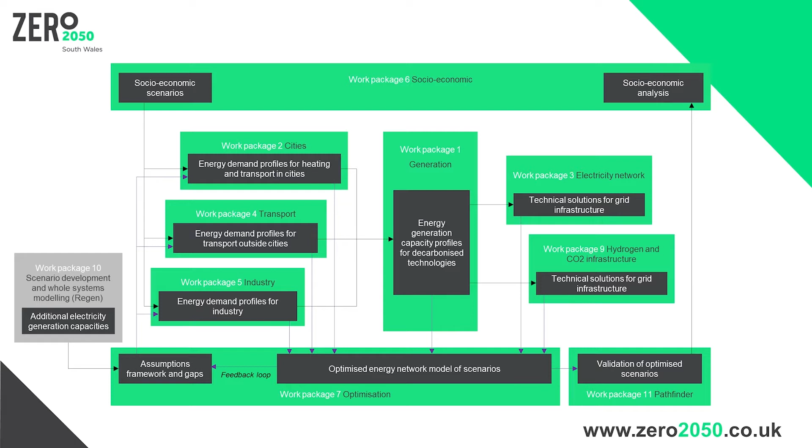This slightly complicated looking slide gives you an insight into some of the challenges that we've faced with this project, with lots of different input from different technical specialists. Making the connections, interdependencies and data flows clear between the teams has been one of our key challenges. And we're now at the point of beginning to have a confirmed set of inputs to our modelling, with initial results to follow in the weeks and months ahead.

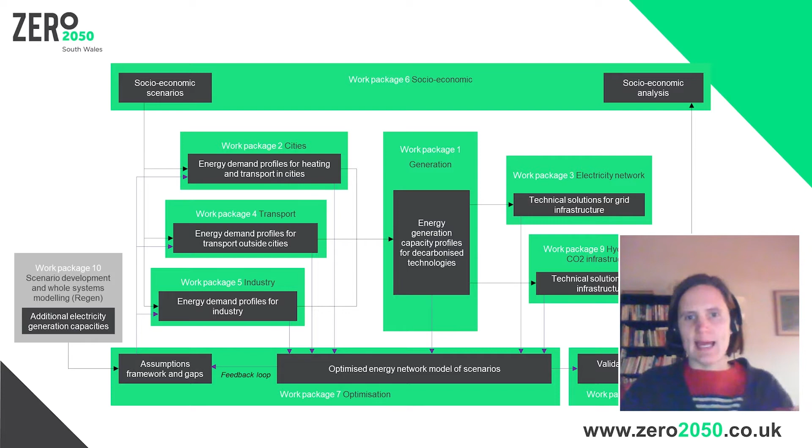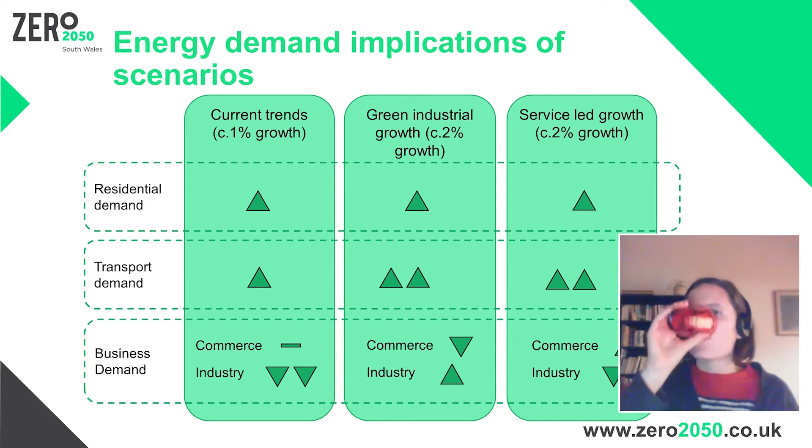So a little bit earlier, I mentioned scenarios. These are the 3 socioeconomic scenarios that we've developed, and we've considered how the energy demand might be different under each of the 3 scenarios. We've also developed a socioeconomic baseline looking at factors such as GDP and fuel poverty, and we'll be looking to assess the socioeconomic impact and opportunities emerging from our technical outputs in due course.

This next slide just gives you an overview of where the project is up to. On slide 4, you saw each of the different work packages, and many of those have now concluded. So we've completed our analysis for the decarbonisation of heat, of transport, industry, and energy generation sectors.

As I mentioned, we've got the socioeconomic impact analysis framework, and our optimisation analysis is underway, looking to help us design the most cost-effective pathways, looking at the timestamps of 2030, 2040 and 2050 to help us see the optimal pathways through this and deliver no regret solutions. We're looking to publish our final report and recommendations in February next year, so do look out for that in due course.

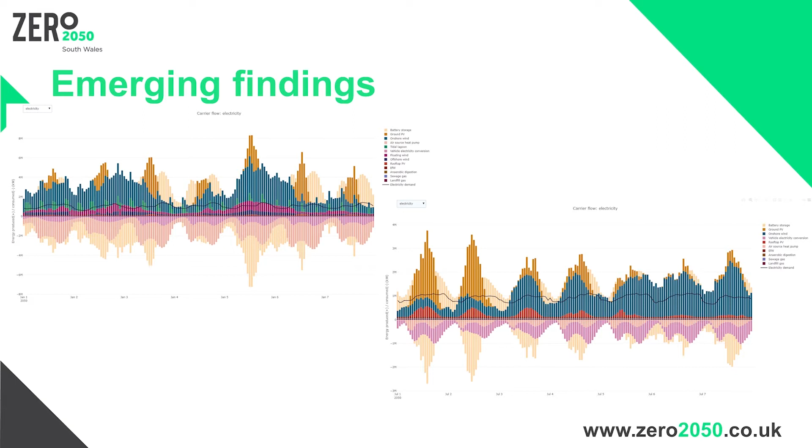As our optimisation is still underway, these graphs on this emerging findings slide are deliberately small and illegible because these are just indicative results rather than actual results at this stage. But they give you an indication of the type of output that we'll get. So we'll get an optimized mix of generation to meet hourly demand. And as I said, looking at this across 10 yearly timestamps to help us see those optimal pathways and think about the no regret solutions. What can we do now that we know will be needed in each of those 3 timestamps?

I thought it was just useful, whilst this project is by no means complete. We've been going for some time now and have identified a number of different challenges that we will continue to debate and will continue to evolve over time. And I thought I'd just share some of those with you now. So first up, we've been taking an approach to modelling the lowest cost solutions across the whole energy system. And we know that costs and benefits aren't allocated in this way. So understanding and working out how best to share those costs and benefits will be really important in order to achieve that objective of a just transition.

We began this project and thinking about the transport demand in the future before COVID, if you can even remember that time when we weren't all locked in our homes. And there remains a lot of uncertainty following this period of time as to how the future of transport might change in a post-COVID world.

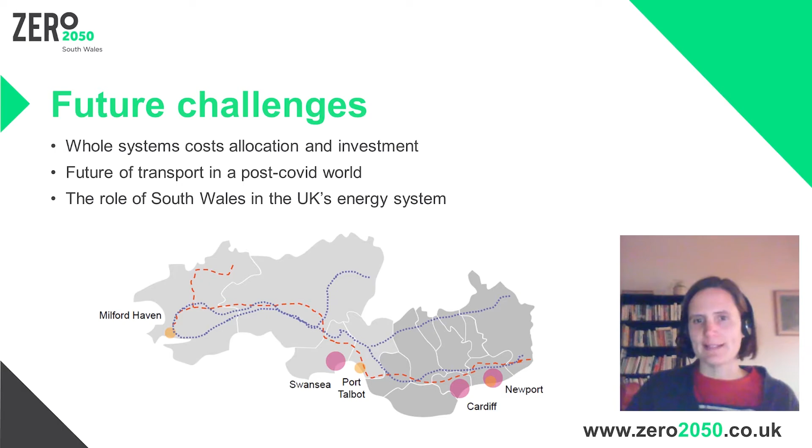Hello everyone, I'm Lin Wei Chen, working in the National Grid Electricity Transmission Innovation Team. We have set up the multi-vector modelling project with Manchester University to look at the impact of heat and transport decarbonisation on our networks. And today I'm glad to invite the research team to present the outcomes we made through the project. I will now hand over to Alex and Asad from the Manchester University.

Firstly, as mentioned by Lin Wei, this project aims to investigate the impacts on the power network of different heat and transport decarbonisation pathways, for example, the Future Energy Scenarios, FES. Secondly, this is not a straightforward process, as the pathways are constantly changing. Thus, rather than producing a single study for the existing pathways, our objective is to develop a flexible open access tool which can be used to investigate emerging pathways and support the development of new ones. Thirdly, the proposed tool, which brings together top-down targets and bottom-up modelling, produces energy data with high temporal and spatial resolution, which will be demonstrated with applications to Greater Manchester.

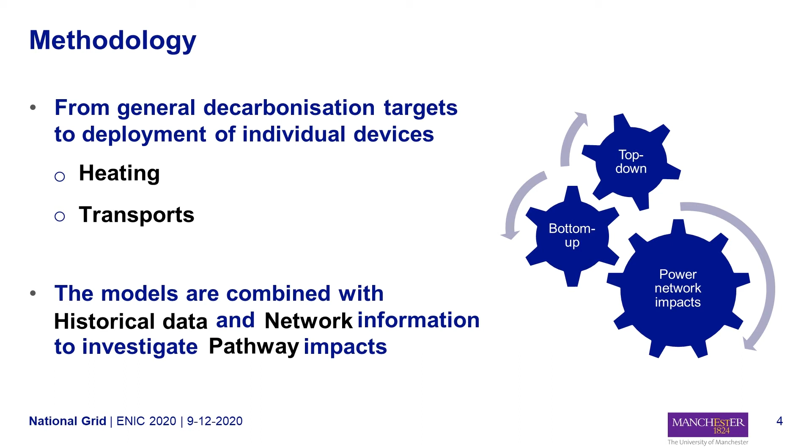And in order to produce data with the required temporal and spatial resolution, we have proposed a tool that brings together top-down decarbonization targets with bottom-up modeling of individual technologies for heating and transport. The tool includes multiple models which use network information, historical energy consumption, temperatures and other data as a means to model decarbonization pathways.

As shown here, each component of the proposed tool involves a wide range of detailed models. For example, the tool allows defining multiple heating technologies which can use different vectors, including hydrogen, electricity, or other customized vectors, and also allows us to customize the operation and sizing of the devices. My colleague Asad will address this further.

Ultimately, we combine all these different models to produce energy profiles for representative years and peak 1 in 20 conditions, which are modeled with half-hourly resolution at the primary, BSP, and GSP levels. I will now hand over to Asad, who will present the second half of this presentation.

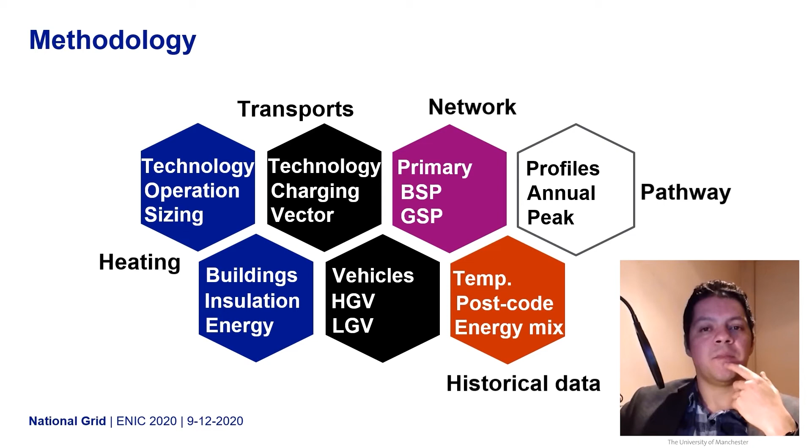Thank you, Alex. I will first introduce the multi-vector energy integration tool, along with its main features, and then its application in the context of Greater Manchester. This tool uses the above-mentioned methodology and first calculates the energy demand profiles for each type of consumer, then aggregates for the number of buildings or transport vehicles in each postcode, and results are calculated at a primary substation level.

The heating profiles are modeled for the domestic, commercial, and industrial consumers, where there are separate profiles for buildings such as flats, terraced houses, semi-detached, and detached houses. The tool also considers the effect of improvement in thermal insulation, being good, medium, and poor, and assumes improvement in insulation is aligned with the amount of electrification. For transport profiles, the electric vehicle profiles are modeled with both slow and rapid charging options.

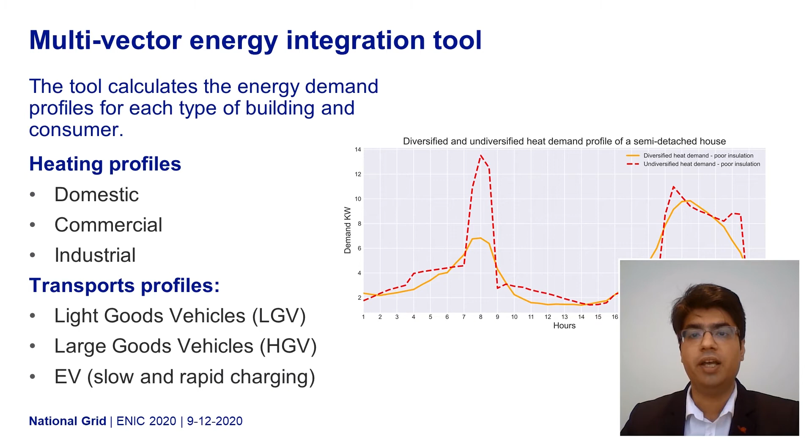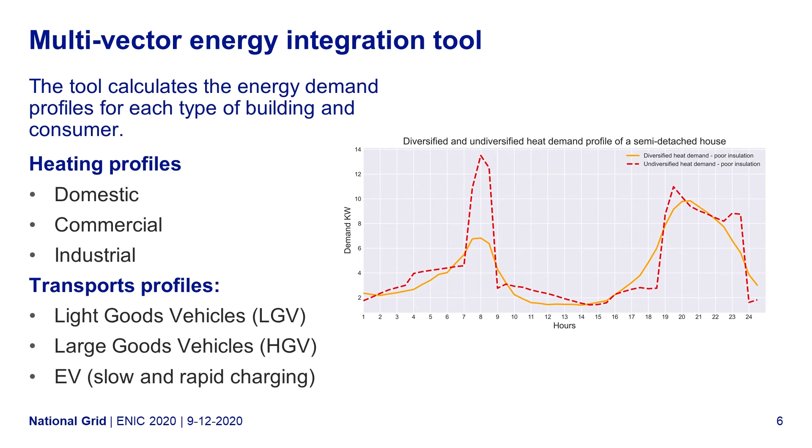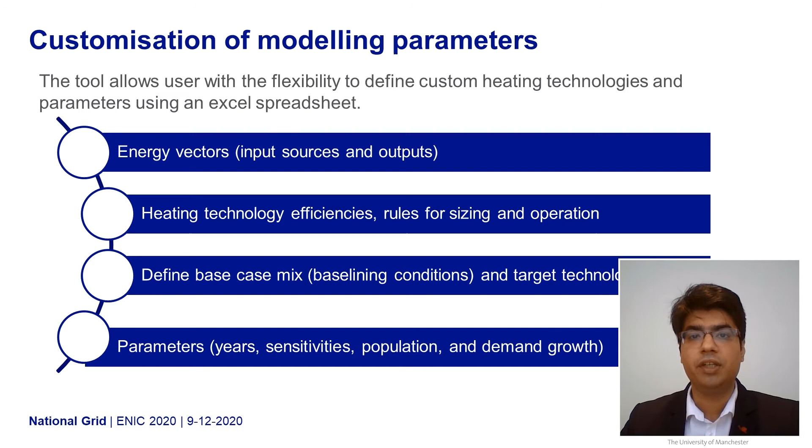It is worth highlighting that this tool is available as an executable file, and it is possible for the transmission and distribution network operator to make changes in its source code, but this will require a MATLAB software license. The tool allows users the flexibility to define custom heating technologies and control parameters using an Excel spreadsheet. These settings include energy vectors, custom definition of efficiency, rules for sizing and operation of different heating technologies, for example, heat pumps, resistive heating, etc.

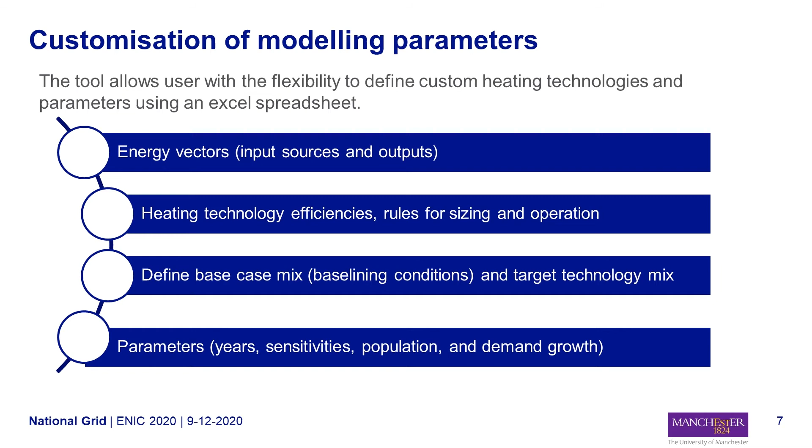Define baseline conditions and target technology mix, and even modification of parameters such as percentage of electrification, sensitivity, population, and demand growth. Now this slide shows the summary of customization features that add flexibility to the tool. The first column of the spreadsheet contains the list of technologies. The second column provides the flexibility to assign whether a technology is connected to a district heating network or not.

If it is, then the tool will search for regions with high annual heat demand density and consider that technology only if the postcodes are feasible for the district heating network. The third, fourth, and fifth columns are the most important ones. The efficiency column enables the user to define additional energy vectors along with their efficiency. The sizing column sets rules for the capacity of each technology.

The capacities can be sized either at a typical year or 1 in 20 peak year, or even a user-defined minimum design temperature. Additionally, the tool calculates the sizing separately for each technology. This is helpful if one technology needs to be sized at a typical peak year, while another at a 1 in 20 peak, as shown in this example here.

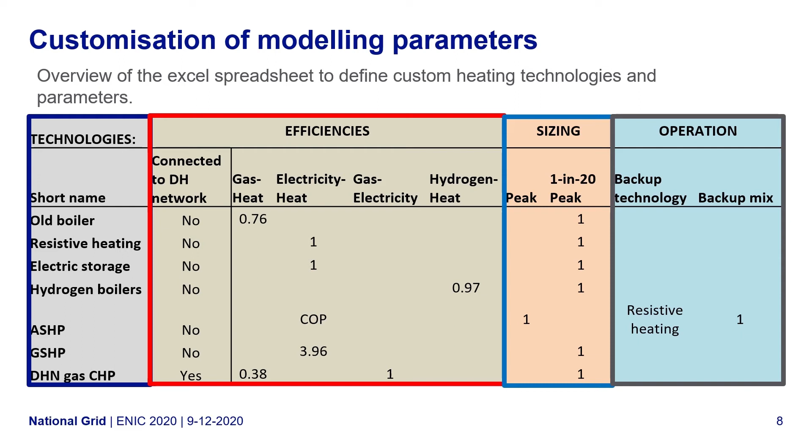The operational column deals with the definition of backup technologies for the unfulfilled heat demand. This is particularly useful when extreme events are to be modeled, or the technology capacity is undersized, and the preferred backup technology can be provided in the column named Backup Technology, along with its share in the adjacent column. As mentioned earlier, it is a complex and challenging task, which is evident from the limited number of parameters shown here. The Excel sheet contains more parameters. Now I will move to the next part of my presentation.

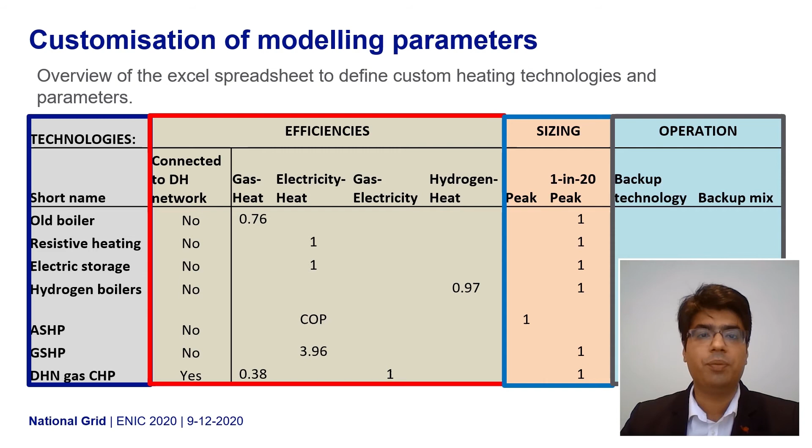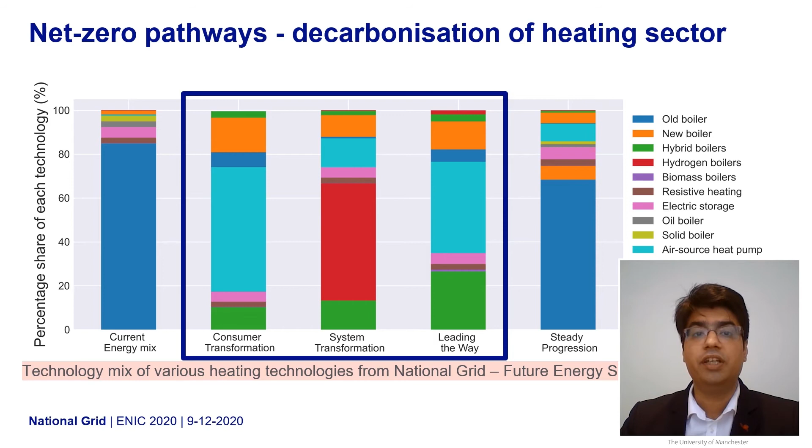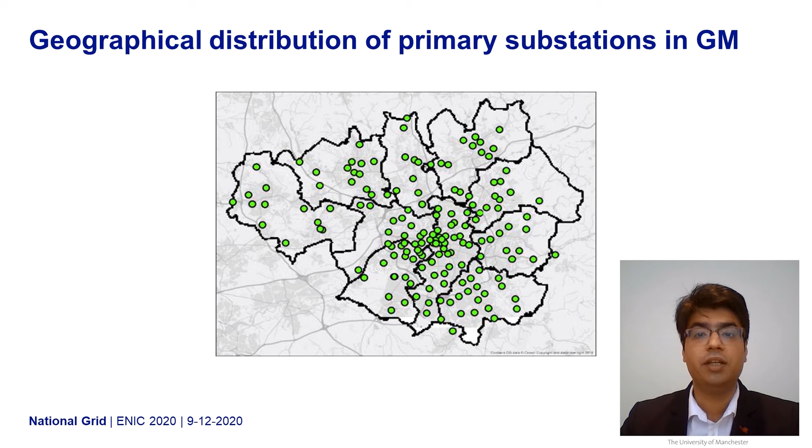Here, these pathways are used to investigate the electricity demand requirements with the decarbonisation of the heating network in Greater Manchester by 2050. This slide shows the geographical distribution of 188 primary substations in Greater Manchester, which are investigated using this tool. Only one of the substations is selected as a representative example to show comparison between the heat demand profiles in the following figures.

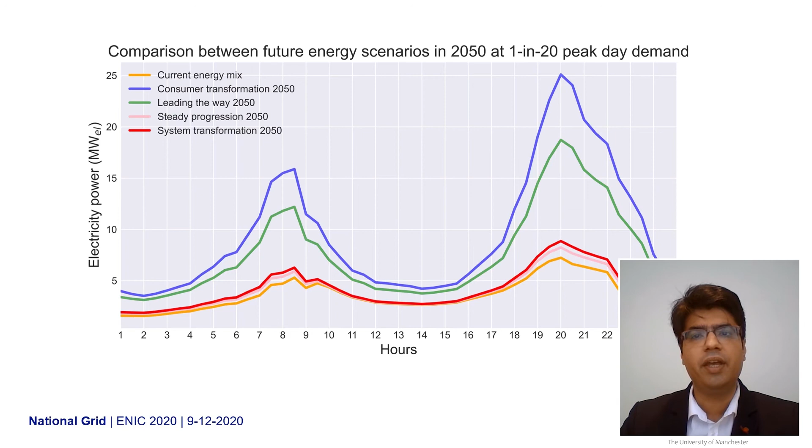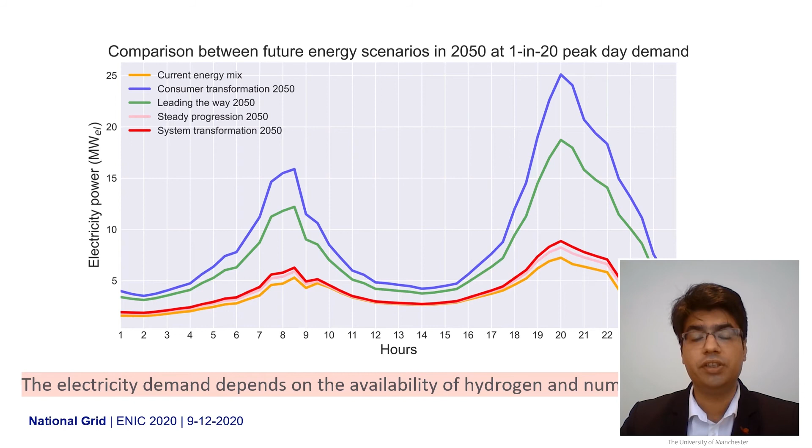In the next slide, the data shows the comparison of operational electricity demand profiles among different future energy scenarios. Comparing results for year 2050, the consumer transformation scenario has the highest amount of electrification compared to other net zero scenarios, and the peak electricity power demand increases up to 25 megawatts compared to the demand of 7.2 megawatts with the current mix of heating technologies. This suggests that the electricity demand in the future net zero pathway depends on the availability of hydrogen and the number of air source heat pump installations.

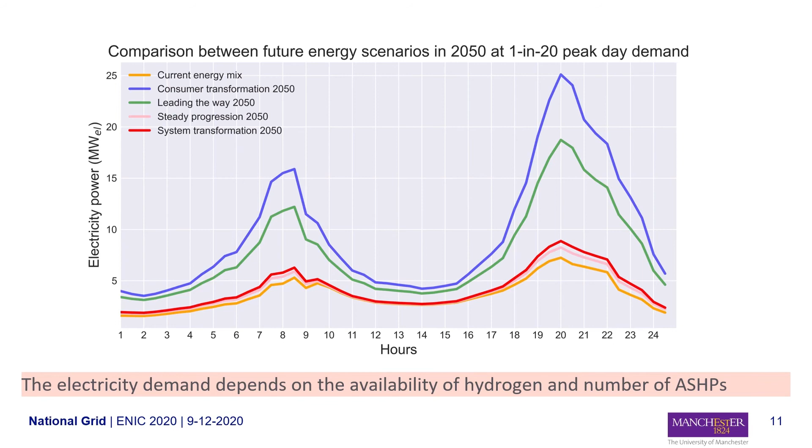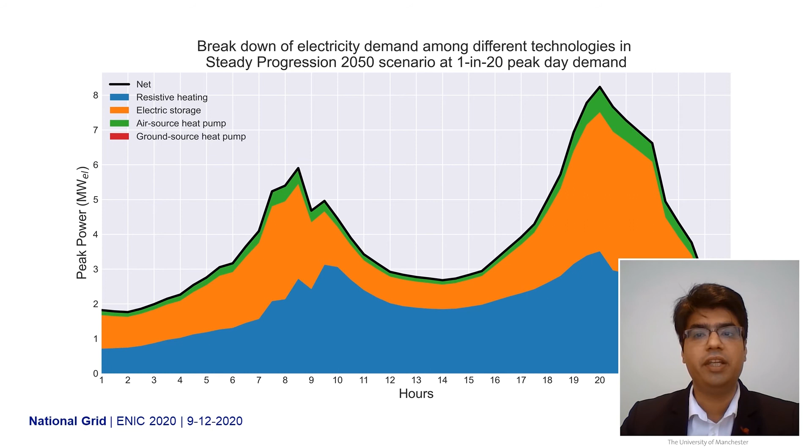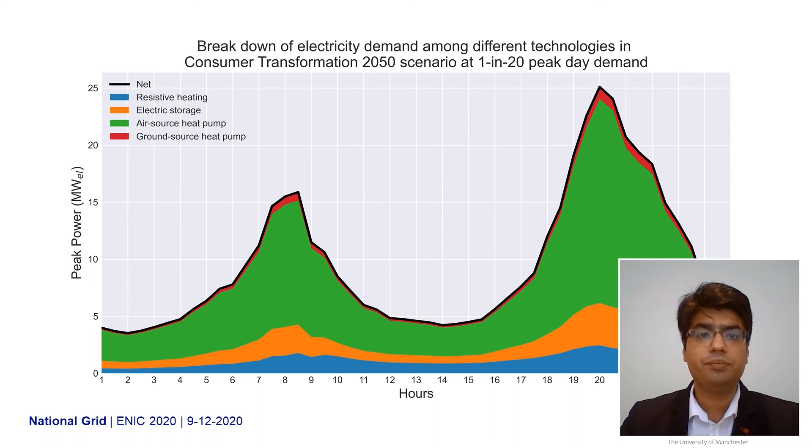The breakdown of the electricity power profile among different technologies shows that in the steady progression scenario, the electricity power demand is mainly dominated by resistive heating and electric storage. However, in future this will change, and the electricity demand trend will follow consumer behavior with the increased number of air source heat pump installations. As shown here in the consumer transformation scenario, the demand has two peaks, one in the morning and the other in the evening. This highlights the need for future demand side management analysis to mitigate these peaks.

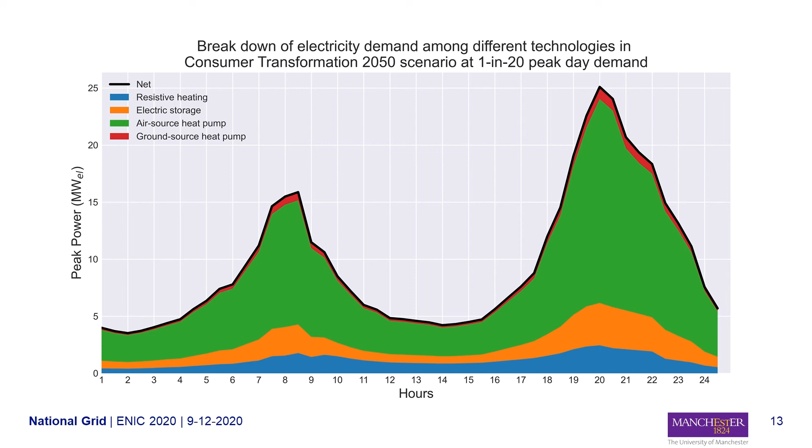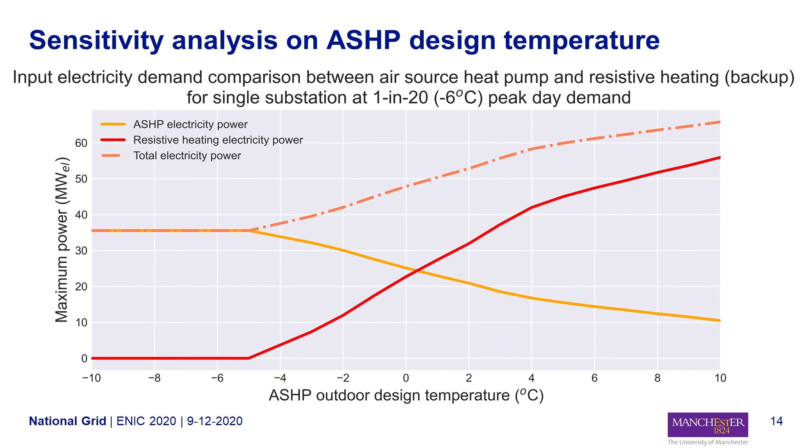Besides these analyses, the tool has the capability to challenge existing design practices. To this end, a sensitivity analysis has been performed to investigate the electricity demand of an air source heat pump with varying design outdoor air temperatures in the same region discussed above. The air source heat pumps are considered as the primary heating source with a share of 100%, and resistive heating is considered as a backup technology for extreme events.

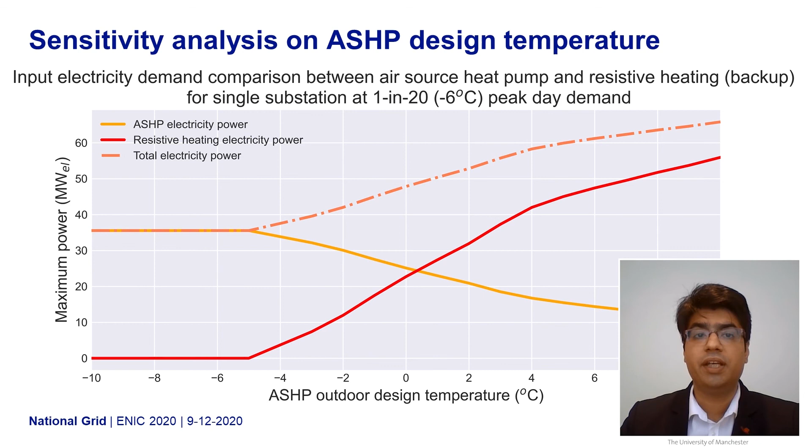Now, if I summarize everything and conclude: firstly, the energy demand of a future net zero electrical grid depends on the availability of hydrogen and the amount of air source heat pump installations. Secondly, in future, with the electrification of the heating sector, the electricity demand trend will follow consumer behavior. Thirdly, the air source heat pump should be designed at lower outdoor temperature, as this reduces the electricity demand from the electrical grid.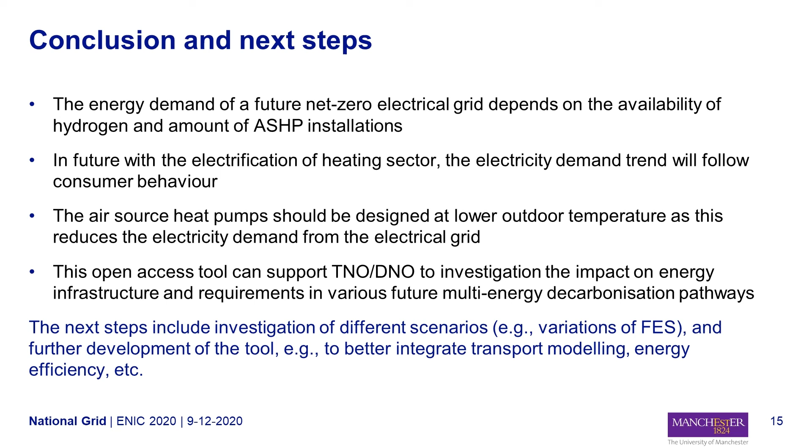Finally, this open access multi-vector energy tool can support TNOs or DNOs to investigate the impact on energy infrastructure and requirements in various future multi-energy decarbonization pathways. As I mentioned earlier, this tool is still under development. The next steps include investigation of different technologies and scenarios, variations of future energy scenarios, and further development of the tool, for example, to better integrate transport modeling, energy efficiency, and other things.